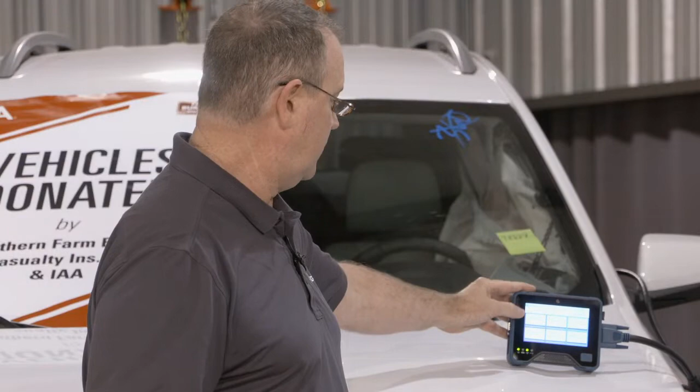So basically, the buttons on the device, I'm going to hit the quick scan button to get us started. I've already turned the key on the car, so we're skipping a couple steps here for preparation purposes, but the key is on. We're now communicating, pulling up the information related to this specific vehicle, the VIN number, what features are on the car, and setting up for which networks we need to communicate. On this particular device, I have to put a password in, because I have one of the special fun devices with all the good stuff on it. And we'll go ahead and log in.

Now, Bob, when we talk about quick scan, I see there's a lot of companies in the market that advertise they have this quick and easy capability. Is there differences in different tools? Is what you're doing right now different than what we're going to do later in the repair? Is it looking at less modules, more modules? For someone like me, when you say quick scan, I'm like, does that just mean it's fast, or does it mean it's only doing 10 of 20?

We're going to try and talk to every module that's possible in the vehicle. That's one of the unique features, we're going to look at every possible module. For example, guys always complain a little about Honda, it takes longer to perform a scan because we're going to try all 80 modules. On that particular year or brand, we're going to try everything that's there. In the case of GM, there can be wild cards, so we've got to pick a transmission. This happens to be the 9-speed, and that'll keep variables there. Even if you use the factory scan tool, a lot of people know RPO codes, right? This is where you would have to enter the data to get it more accurate.

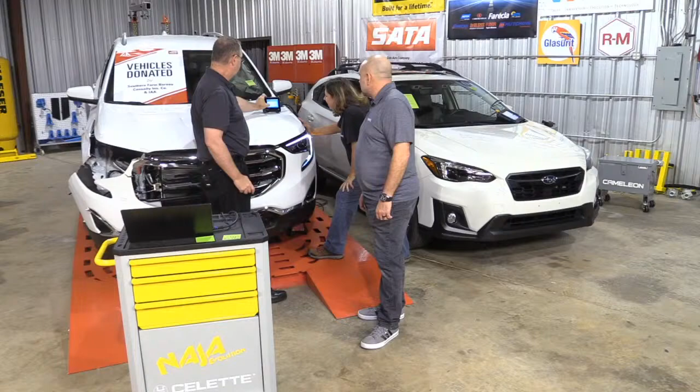At this point in time, we have scanned all the modules that are available. And if we scroll down, there are codes in here. We got some fan codes, and we know this has gotten hit in the front, so we have active grill shutter fault codes. Everybody watching right now is seeing what we're seeing. So we're scrolling down, there's a ton of codes. Active airbags have deployed, radio type codes, headlamp control modules, inflatable restraint, a ton of those. We have a few air deploy flags, deployed airbags on this one. So basically, everything that we can retrieve.

Now, the interesting part is somebody always asks, well, what happens if a module's been knocked off in a collision? How does it know that? Well, every module has a buddy. So with any networking system, there's another module watching out for another module. It's like asking, hey, we went to Vegas, where's so-and-so? Somebody should be reporting back into who was in charge of that person, right? Where's your buddy? And if we had a module that was missing, I would have a networking code, which I'll explain more in a moment, that will report on that module.

So you can actually learn a whole lot more. And the interesting part is by looking at the pre-scan data, you wouldn't even have to look at the car. Just because it has an air shutter code and the airbag code, it's a pretty significant collision, right? You can start narrowing that down. If all the codes for the rear backup sensors and the right blind spot monitor module are gone, then we know that car was hit in the back.

So there's a lot you can learn from the data there, but this is where the magic comes in. How do you interpret and learn how to work that data? All right, so now what we're going to do is we need to get this data out of here, and we need to get it into our repair order. I thought we just hit the clear codes button and we're done. Well, there's some questions. So if right now I was confused, I can go ahead and get tech support if I wanted.

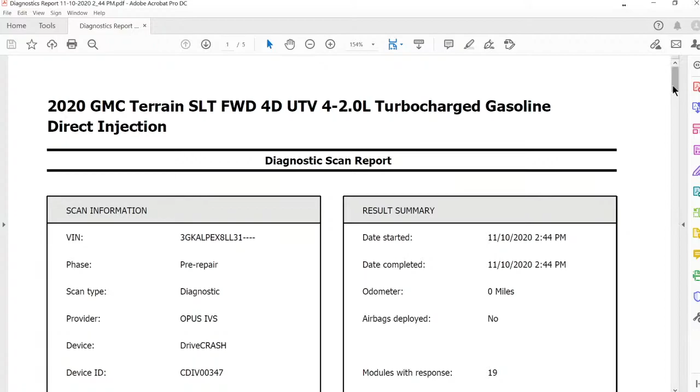The neat part is the estimator now knows where it's at, the first part of the blueprint task is complete. So here we'll go to the diagnostic report, we'll open that up, and here's all the data that we collected in print form, with all the codes that we've extracted.

So kind of bringing up your example, the movement within the shop workflow, you're primed and ready to share that information with the customer because you've quickly created it and documented all the codes. Now if there's any variables, you could go right down the report and say, yeah, that's collision related. Well, wait a minute, a little evap, needs a bit more research. How long has this one been there? Yep, this is why we don't clear codes.

And this is what's being asked in the industry, in addition to getting the codes, is actually what we call freeze frame data or secondary indicators. When did that code occur? An experienced technician can go back in, and if you haven't cleared the codes, they could go back into the modules and find out what mileage that code set at. So if it happened 10,000 miles ago, it's not related, be more on that side of it.

So that's the report there, and that'll be under the attachments tab for the people who are CCC savvy. And then for the invoice side, we're going to go underneath the parts tab by document type, and there's the draft of the invoice. At this point in time it only says $10 here, but that's where you would adjust the pricing based upon whatever rules you have for the area.

Does one insurance company call more or less? Is it a labor charge versus a charge there? And then you add that to the estimate. So that right there is really the crux of quickly getting the data from the device into the repair order.

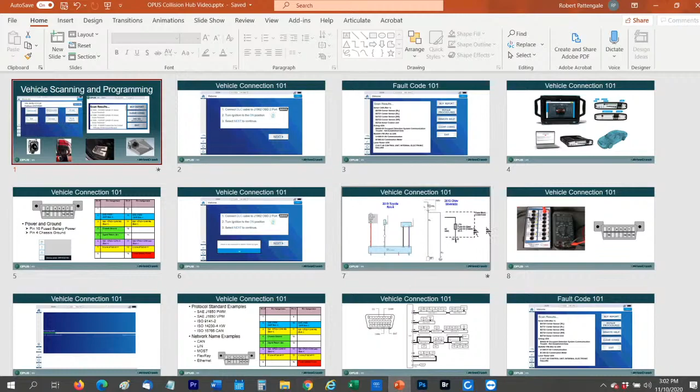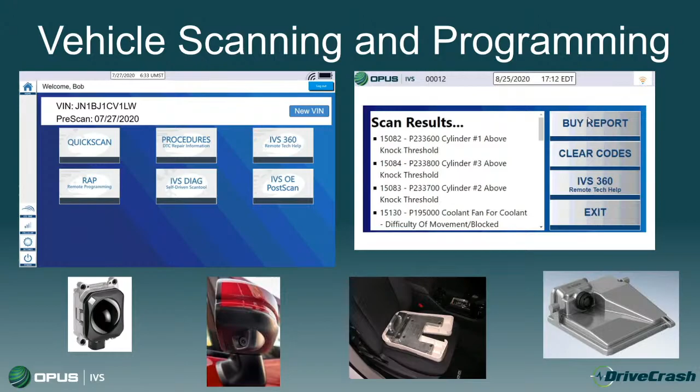So what I was thinking of doing now is to talk more about the scanning strategy and a little more of the details of the device. If we look at scanning from the principle of a quick scan, all we're trying to do is get some codes and send that data. If you can't analyze it, get somebody to analyze it. But in reality, what's happening behind the scenes is more of what's in the device itself.

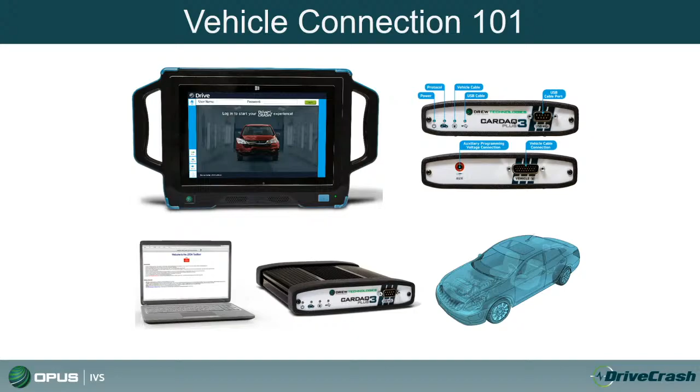So in this particular case, if you wanted to run an OE scan, let's say we wanted to do a Honda factory scan or GM factory scan, what would we have to do? We would have to go get a laptop, get a J2534 device or the OE device, sign up for a subscription to General Motors, download all that software, install the drivers for the J2534, and get all of our credentials in line before we can click the first button to scan the car. That's what you'd have to do.

I can't even turn the power on. We're done. Multiply that out by many, many manufacturers. That's really the key there.

And the beauty of the J2534 device that's evolved since the early 90s with OBD is that most manufacturers allow you to use their OE software through a J2534 device. The difficulty is managing the PC. Joey at AE Tools, Joey Hendrick, he produces laptops for shops. He has to have at least 3 different partitions on that laptop because Ford software doesn't always play with Mazda, since they use very similar drivers and DLLs. They can't play with one another. So this becomes very complicated for a shop to do.

OE scan tool is just not feasible for a collision repair center fixing multiple models of vehicles. If I'm a dealership, cool. But if I'm Bob's Collision Center and I've got a Nissan, a GM, and a Subaru in any given week, owning all that isn't just about the money. Some people have the expertise issue on top of it. It's maintaining the physical hardware of the laptop. That's a lot of IT. And like I said, I'm struggling to just turn the car on.

And that's the brilliance of it. We take the J-box, put it in there, put a PC together, load all the software on the device. So all you have to do is hit OE scan, put some pieces of information in there. We'll walk through it all the way up to the point of doing an OE scan, so you see what it takes to actually do that. It's about 6 screens and you're done.

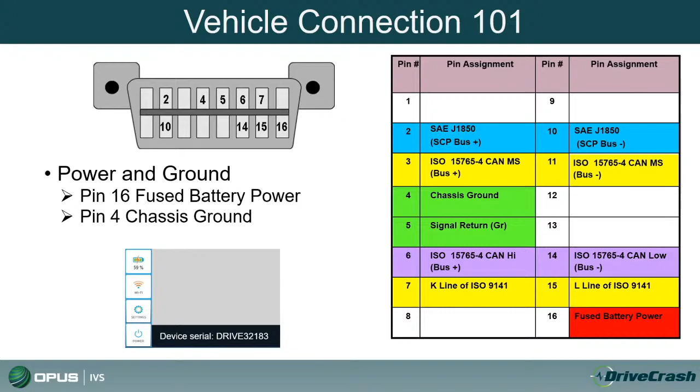If I plug the device in and it has no communication, well, why is it not communicating? Sometimes in a collision, fuses get blown. Things happen with the vehicle that may preclude it from allowing that to occur.

That's one of the extra features. That one has a battery in it. But in many cases they plug it in and they don't know. We've got a lightning bolt that shows that to them, that there is power there.

But a collision person who's not familiar with diagnostics is like, I was just taught how to plug it in and push these buttons. What if it doesn't work? That offers you just a little bit more information on all the different networks that are out there.

All right, so we talked about that. This is one of the questions that we get pretty regularly: if it doesn't communicate, how do I deal with the lack of power to it?

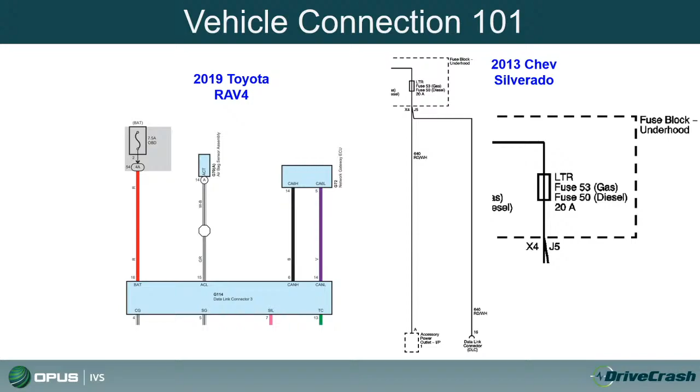Some manufacturers have a dedicated fuse. Some manufacturers, like on this Chevy Silverado, use the same fuse that feeds the lighter. We can't really call it a cigarette lighter anymore, right? We call it a cell phone power charger adapter. So anybody who plugs in whatever and pops that fuse, now you're not able to scan the car.

Okay, so that's that piece of it. Then if you're a little more studious - and I brought this slide in mainly to talk about the fact that our IVS 360 guys, one of their tasks when they communicate with a collision shop, is to determine who we have on the other end of the line.

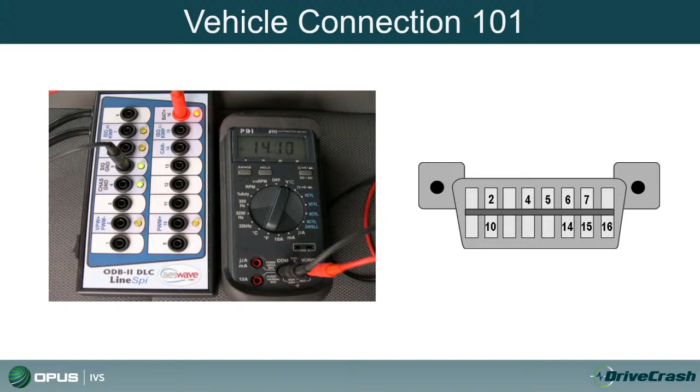So is this where you quiz us to decide whether I'm competent or not? That's the question, right? Now I know why I'm on this show. The scan tool won't work. Well, okay, tell me what it says. It says I have no communication. It's your scan tool that won't work. I mean, I'm clearly not going to take any ownership of that in the collision repair industry. Your tool don't work. Yes.

So we had another question come in, which I think we may have already answered live here: how internet sensitive is the unit? The internet service in some shops is generally not optimal, I'm guessing. Will this cause some problems?

Yeah, you've experienced it, right? Yeah, this is the real world. Thank you, John, for that. So it's one of those things where, like I said, we were talking about it - I used to worry about, do I have the right power, 3-phase, et cetera, in the shop? Do I have the right clean air to run my tools or whatever? Well, now I got to worry about internet. And so that may mean it's not about just bringing internet into the office anymore.

I may have to call a company to come out and help me run repeaters through the shop to get us signal, since we're in a metal building. If I have to have a couple of repeaters put in so that I've got cell or wireless signal everywhere I need to be working, that's part of now owning a shop.

That level of communication, you're going to have to step up. I've got my cell phone, it's Verizon, and I've got anywhere from 1 to 2 bars, and it keeps dropping in and out. So it is very internet dependent, but it's not something you can't fix.

It's not expensive for someone to come in and set the shop up, because in reality, if you're doing all the other computer things you're doing in the shop, you need a good internet connection anyhow. Whether it's using Picatech, accessing OEM information, doing virtual training, or just-in-time training right at your machines, I think it's all important. It's just something we need to evolve into.

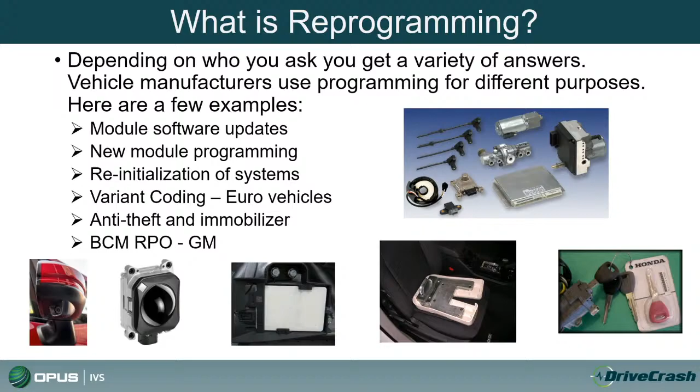So then there's other systems, right? Reinitialization, variant coding. So you put an airbag module in, once again it has to be configured and matched up so it communicates to other modules. I believe a lot of GM vehicles too, for a lot of the ADAS systems, when you're going through the install, it doesn't really talk about calibration, but it talks about doing programming when directed by the scan tool. So the only way you can do that is if you're in the scan tool, otherwise you don't know what you're doing.

So here's my fear, right? We as collision repair technicians struggle to do the things we've been doing for the last 30 years, like welding. And now this is my fear, is that if I don't have an OE level tool and I don't have something like the support, your master technicians guiding me, I can really make some big mistakes that affect customers.

Absolutely, and there's no tool, Bob, there's no tool out there that just does it for you, that automatically fixes everything and all you have to do is push a button. I haven't found that tool yet, there's no magic wand yet. And that's, I think, one of the most frustrating things to me is when I open up the magazines in our industry, you know, money talks in a lot of situations. Companies that buy 4 or 5 full page ads in every magazine out there, or salesmen that come by your shop say, oh no, our tool does it all. And there is no tool.

It does still take a high-level skilled technician, and that's not us, that's not Larry. That's one of the things we know, your role is I'm doing all I can to weld panels on and do my job, much less try to do this. You got to have the proper tool, you've got to have the proper training and knowledge and skill. It all fits together, and without one, it's the old chair syndrome, right? You pull one leg of the chair out, or forget about a three-legged stool.

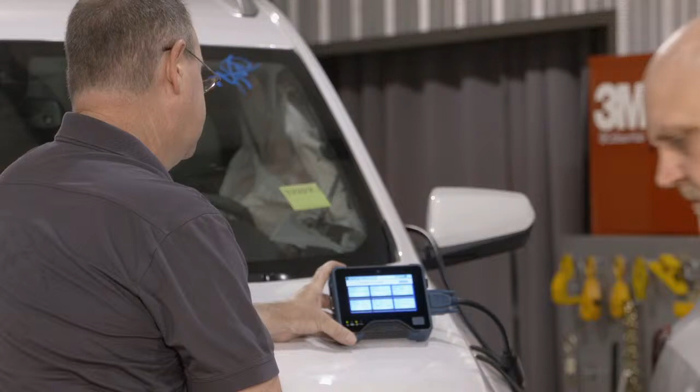That SMS applies to your cell phone. So right now it's gathering the information. It's got some information in the device that it can pull and send as well. And in a moment you should get a message to your phone: thank you for contacting Opus IVS from your shop regarding a 2020 GMC Terrain. Please wait as we locate a support agent to help you.

There it is, right, so now it's in queue. We're basically waiting on that technician. Normally 10, 15 minutes at the most will be the time that's there.

And then once they take the queue, they'll send you another text message: hey, is the device connected up? Is everything ready, ignition key on? Is the battery support connected to the car? And by the way, we do know if it's connected to the car because we can measure the voltage in the device, so you can't lie about it. If it's at 11.9 volts on a 12.6 battery, not good, right?

Gotcha. And we want to help you, right? We were having that conversation before we even started. A $600 battery maintainer, but it's the best investment you can possibly make because these cars will not tolerate that. When we do scans at a collision center in Phoenix, we do a ton of scans at the Penske Collision Center. No matter whether it's pre, post, or OE, it gets a battery maintainer on it every time. We don't skip that step.

Well, I don't have to worry about a false low voltage code popping in. And a lot of the codes we get will be from that particular issue of low voltage, because you can create codes for low voltage.

We have received your support request. Please make sure to have the DriveSafe device connected to the vehicle, the key on with the engine off, and the battery maintainer connected to the vehicle. Now, we're not going to beat you over that, but it's important, right?